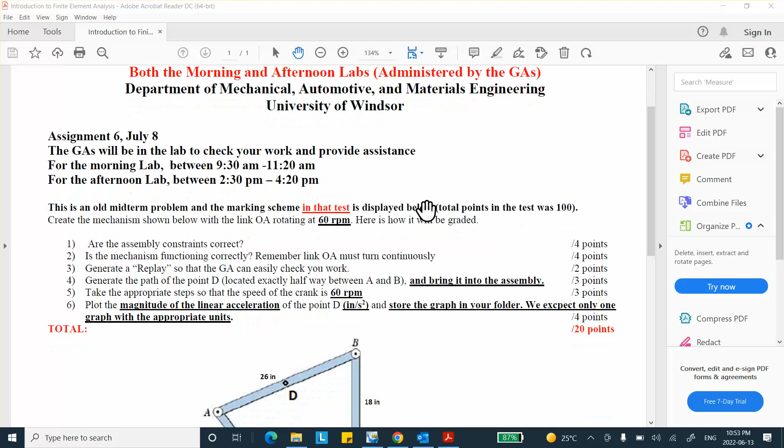Now, it is a problem from another year, a test, I think it was a midterm at that time, but anyway, it gives you an idea of what kind of things are expected, although this marking scheme is not what's going to happen if it was to be given this year. However, at that time, this was the marking scheme.

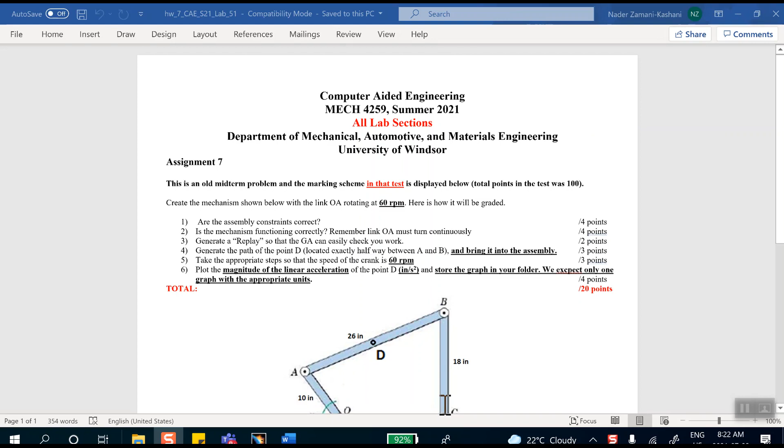This problem is called a 4-bar linkage. So although you see 3 bars, there is also a fourth one, which is the ground, which I'm not displaying here. That's why it's called a 4-bar linkage. So OC is called the ground.

OA is turning continuously, attached to a motor perhaps. This is the crank. AB is the coupler, and BC, which makes an oscillatory motion like this, doesn't go all the way 360 degrees, is called a rocker.

Now, a mechanism of this kind, where one link can make a complete revolution, is extremely important because you can attach it to a motor. For example, the wiper mechanism of a car, where one of the things is attached to the motor, and the other one just rocks back and forth and wipes the window.

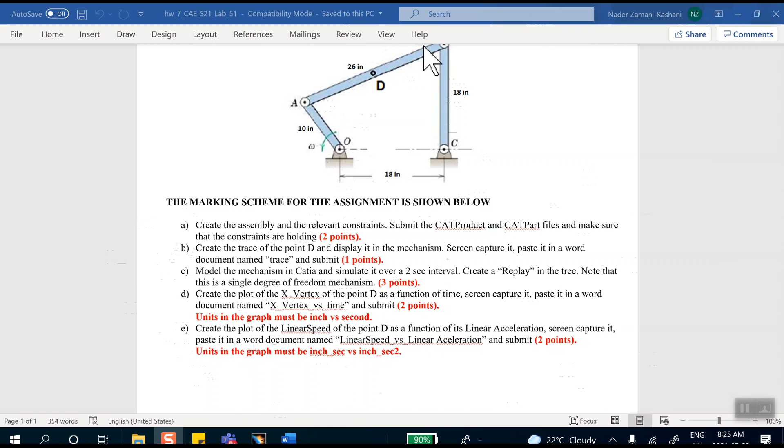Okay, let's go ahead and do that. Notice that these 4 bars are nothing special. All we have to do is make sure the distance between the holes matches what's given, like 10, 26, etc. The thickness and shape don't matter, so I'm going to make a relatively simple one.

First, I'm going to save this product, file, save management, save as. Remember these are all assemblies, so you have to give us the product and the parts. Desktop, new folder. Today is July 8th, and this is homework 7. Let's put it in there.

All right, let us go ahead and make the several parts. Insert new part in there.

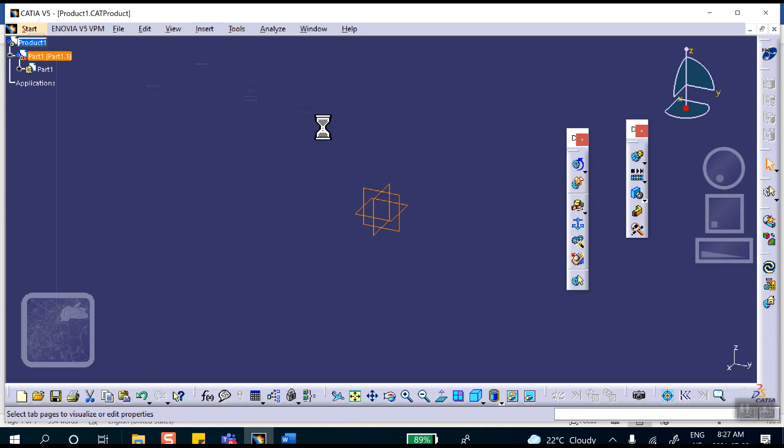First I'm going to make the ground. Let me rename this thing, properties. I'm going to call this thing link... OC, and it is the ground. This is the instance name, and this is the part name, OC ground. Okay, let's make it. Double click on this, make a rectangle.

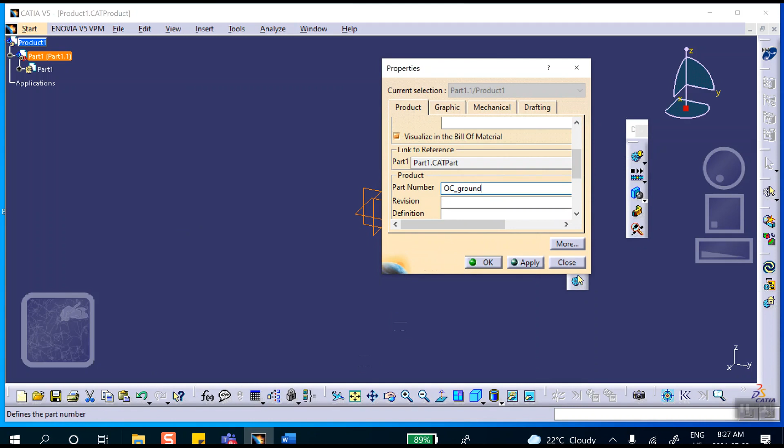By the way, let me go to the assembly design here. Okay, I'm going to switch to assembly design. Now let's make this. Double click on that, double click on this ground part so we go into part design, and on that vertical plane I'm going to sketch a rectangle.

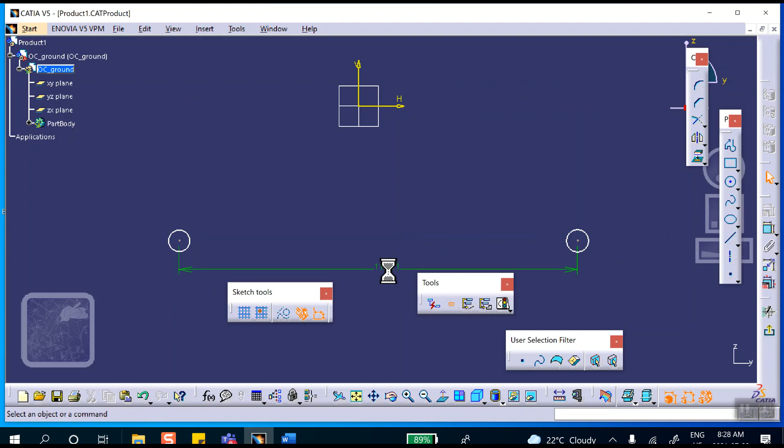Actually, you know what I'm going to do? I'm going to make 2 circles here, one like that and another one like this. I'm going to make the distance between them 18 inches. That's the length of the ground. Let me make this thing 18. Okay, and then complete the rectangle, something like this. So this is going to be the ground length.

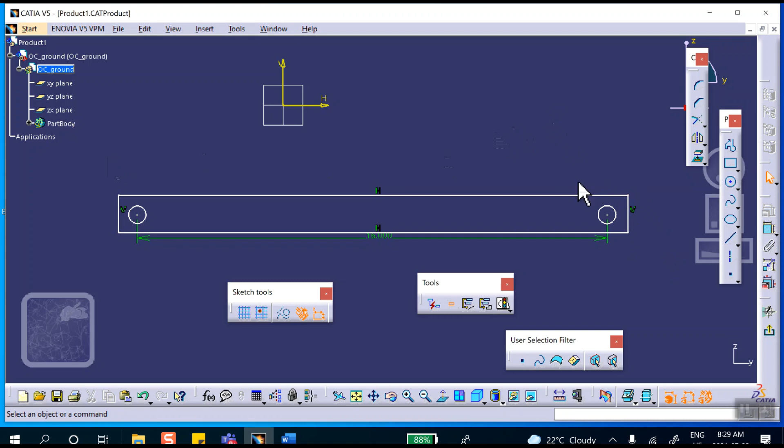Okay, move this thing a little bit to the right. All right, exit, pad it. I'm going to pad all of them by 1 inch, totally irrelevant. Okay, let's go ahead and insert the next thing, which is going to be the crank OA.

So on that, insert new part in there. Remember to insert a new part. This is an assembly, you have to create parts. There's going to be 4 parts and 1 product, and all of them have to be submitted when you do your homework or your test final exam.

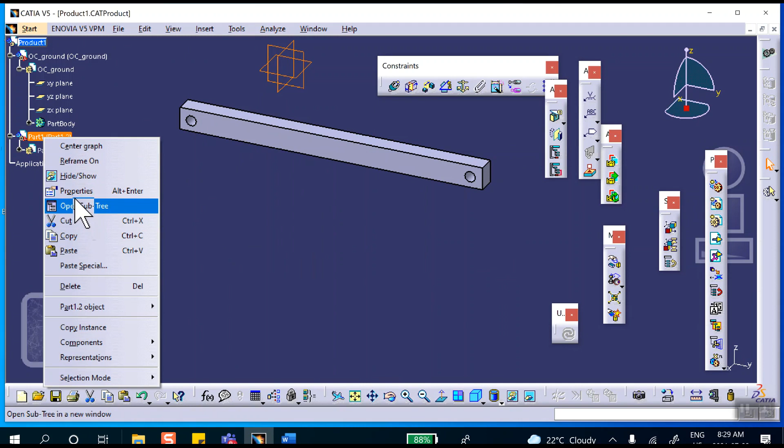Properties. I'm going to call this thing OA, and this is going to be the crank. And down here, OA and the crank. Let's make it, so double click on that. You do the exact same routine. The only difference is that the distance between the circles is 10.

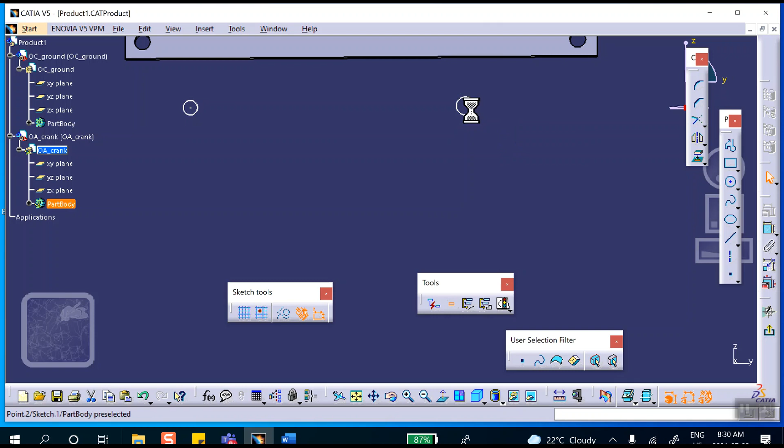Okay. Make a circle here. They don't have to be the same size because they don't have to be the same size as these. So, distance between this point and that point. First let me make it horizontal for the sake of bookkeeping purposes. Actually, well, I'm going to make it 10. It has to be 10. Okay fine, good, move this thing a little bit.

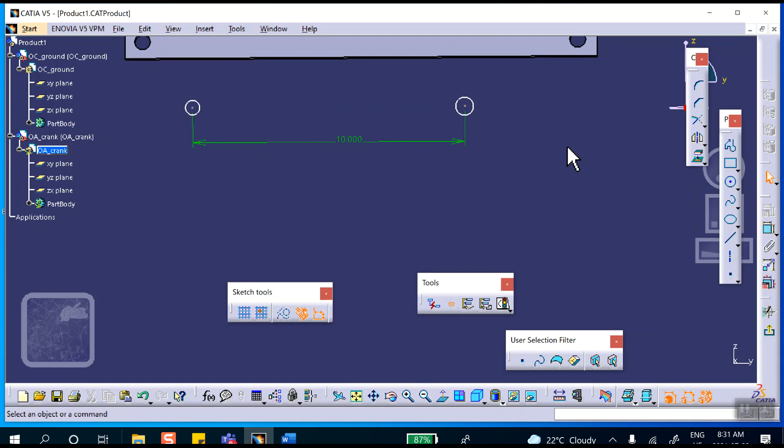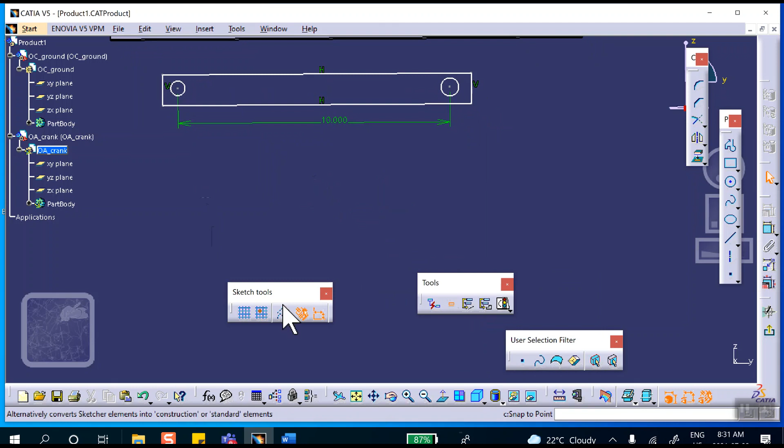Okay, I'm going to draw my rectangle. This is going to be the crank. It just looks nicer if I made this thing horizontal. That's it. Okay, exit. Pad it by 1 inch.

Now let's go insert the coupler. Insert a new part. Say no. Right click, properties. And that is going to be, I believe, AB. AB, coupler. Same thing out here, AB coupler.

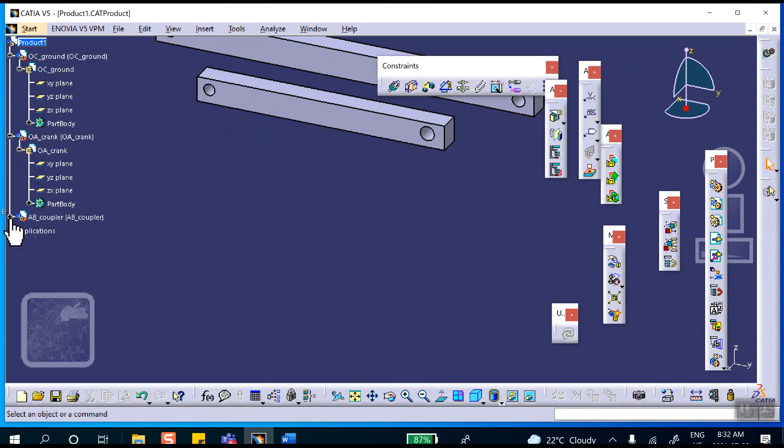Okay, let's make it. Double click on that same vertical plane. We will sketch 2 circles, one like this—too big—another one like that. The distance between them is 18.

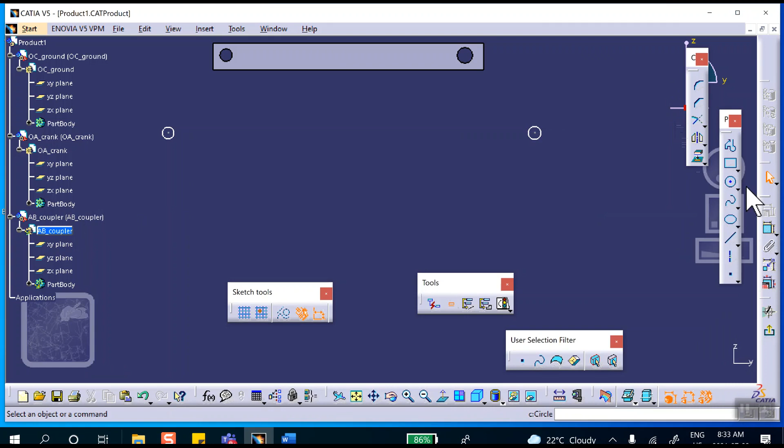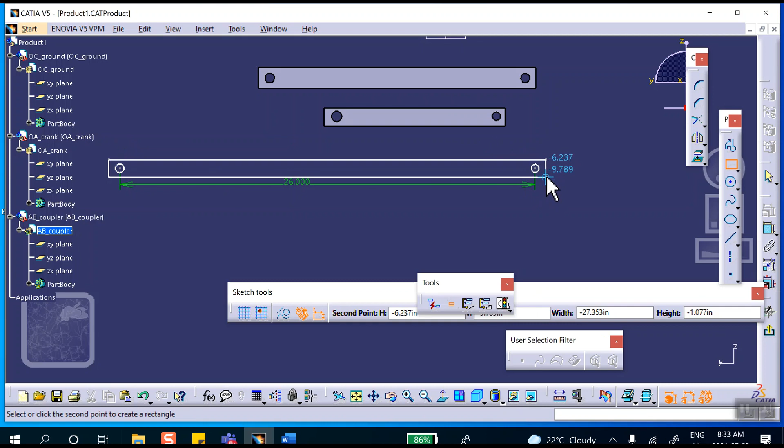Actually, I'm not sure, check. 26, not 18. 26. Okay, and now we're going to complete the rectangle to make kind of something that looks like that link. Exit, pad it by 1 inch.

And finally, the rocker. Go there. No, I haven't saved it for a while, so let me click on the floppy, save everything.

All right, so insert the last part, new part, and this is going to be the rocker, which is going to be CB, right? Properties, CB, and this is the rocker. I can do a cut and paste here too. Right click, copy, go down, paste.

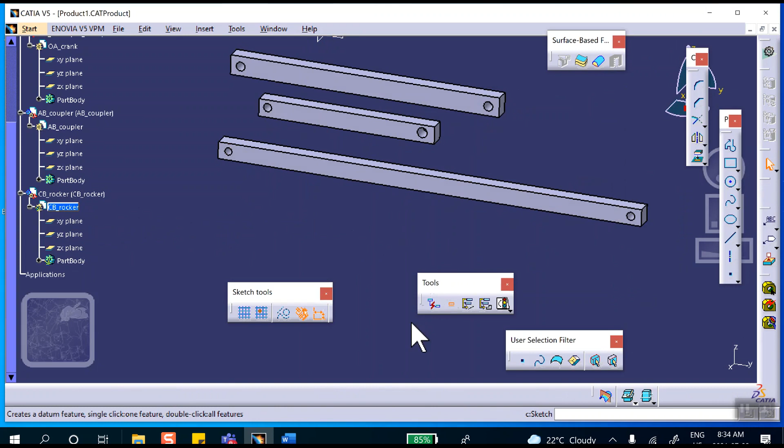Okay, let's go make it. Double click on it, on the YZ plane with a sketch. Now the distance between those guys is 18, right? This is 18.

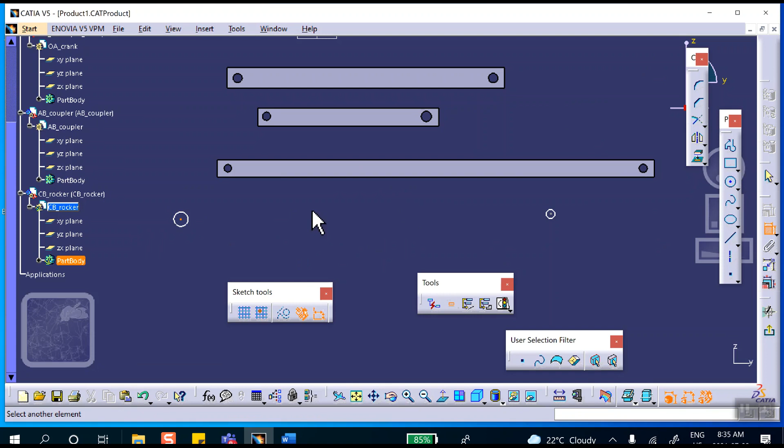So a circle, another one. Okay, so it's fine, they're too big. 18 inches. Okay, dimension between this point and that point, this is going to be 18. Okay, let's complete the rectangle.

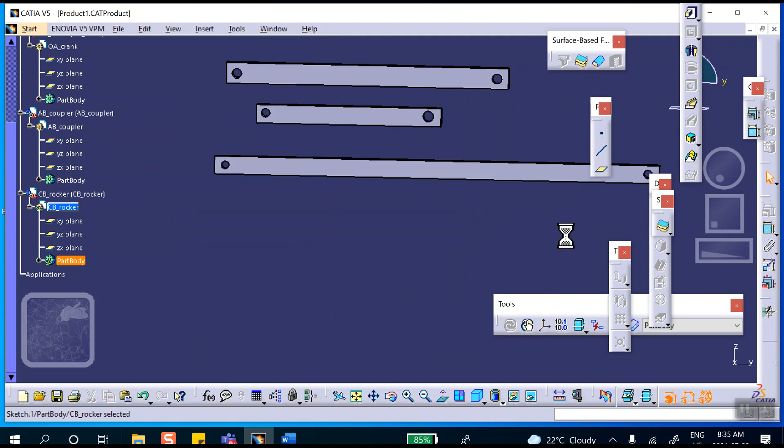Good, I like this thing better. Exit, pad it by 1 inch. Save everything.

And now we use the constraints in order to assemble them. Okay, which one was the rock? I think this was the ground. Let's fix the ground. So here's the anchor. We're going to fix the ground. This was the ground, okay.

Now we're going to put the crank on that. This is the crank, so coincidence. Zoom in between this face, sorry, this axis and this axis. And if you say update, they will line up. You can see that. Let me just move them apart a little bit.

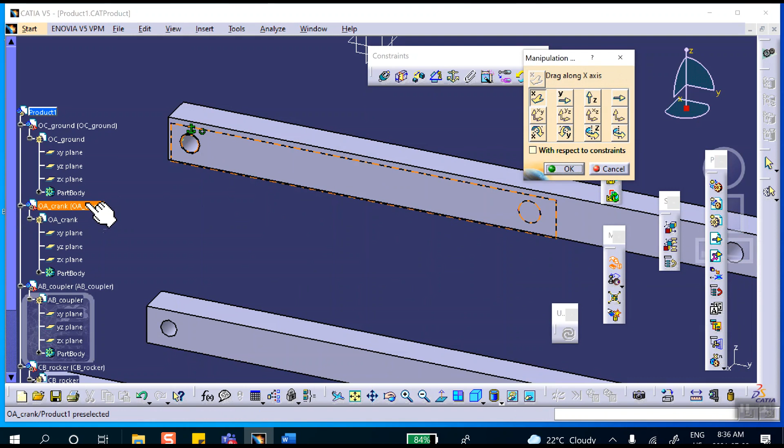So let's translate this part in the X direction so that I can see something there. Because of the way I made it, those surfaces, those sketches are on the same plane, that happens.

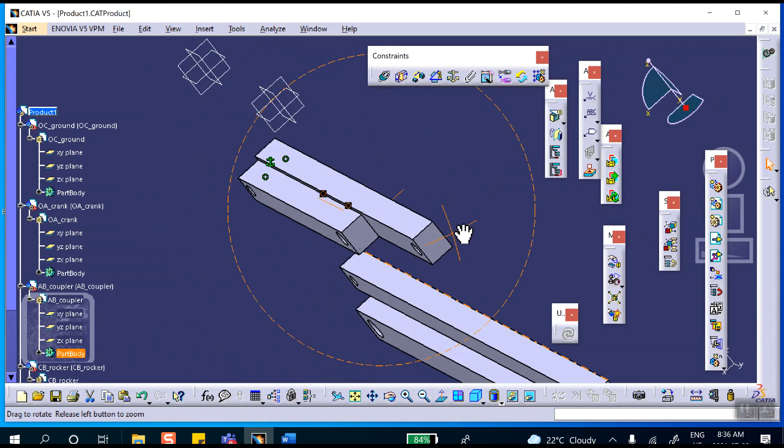Okay, now another coincidence between this axis, the face of that ground, and the face of this. Okay. Update. There we are. Let me rotate this thing a little bit so I can see that. So use the manipulate and rotate about the axis, arbitrary axis. So this is the arbitrary axis. So like this. Very good.

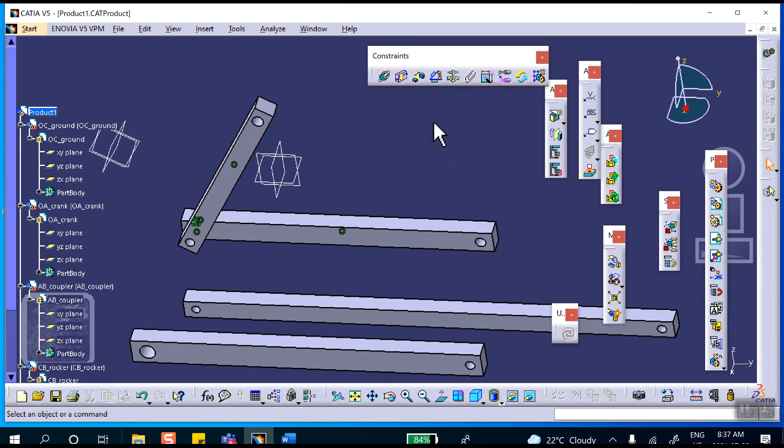This is going to become a revolute joint. And then I'm going to put, how about putting the rocker there? So coincidence, rocker here. Rocker, not rocket. Coincidence between this axis and not coupler, that's what I meant. Coupler there. Okay, update.

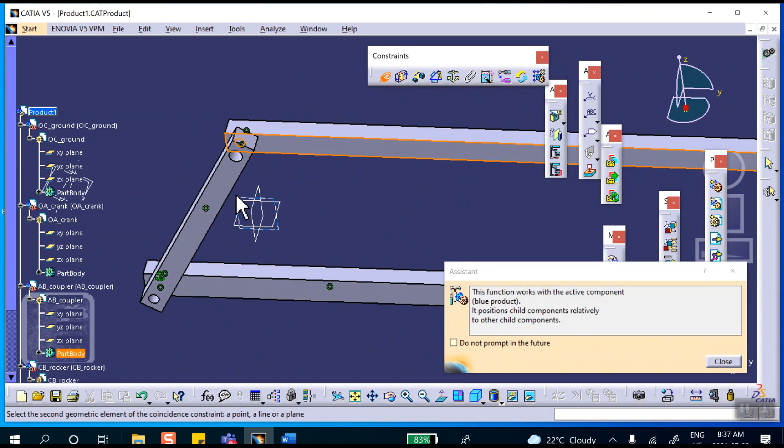This is fine, but except that I want it to be on this side. Okay, that's no problem, so I do another coincidence later on. Coincidence between this face and that face. These arrows tell you whether this is going to end up on the other side or on this side. We'll find out - if it doesn't work, we're going to make this thing opposite.

There, obviously I want it to be opposite. Okay, so you go here. The mechanism works, it gives you the correct kinematic information. It's just that it doesn't look good. So say more, opposite, and update. You see that it ends up on this side.

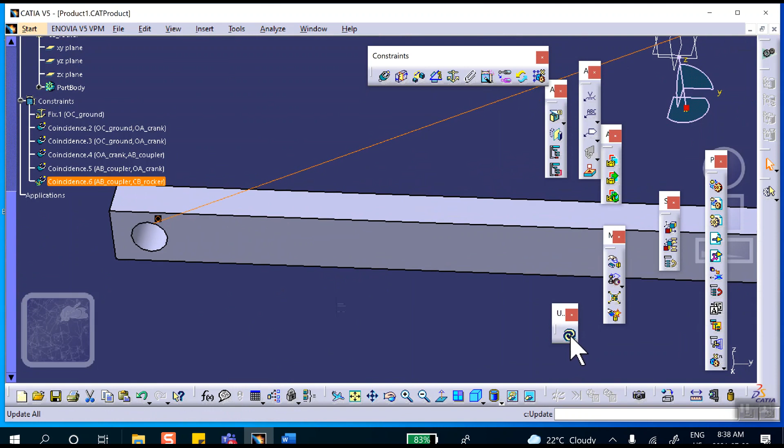Very good. Okay, and now I'm going to put the coupler here, the rocker there. So, well, actually, let's do the coupler first. Coupler and the rocker. Okay, coincidence between the axis of this coupler and the axis of this. Okay, so I want that guy to be on the top. Okay, and update. Let's look at it for a second.

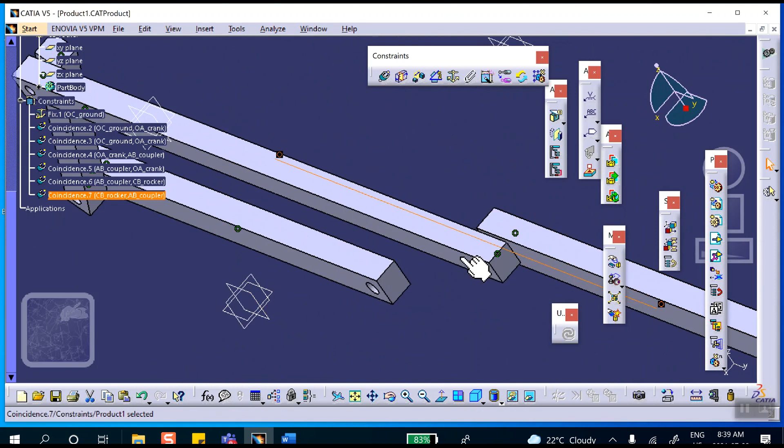Okay, that's good. And then the coincidence between this face and that face. Okay, update. Now what I want to do is bring that hole and make it coincident with this. Let's do that first. So coincidence between the axis of this and the axis of that hole, and update. Okay, so this is fine.

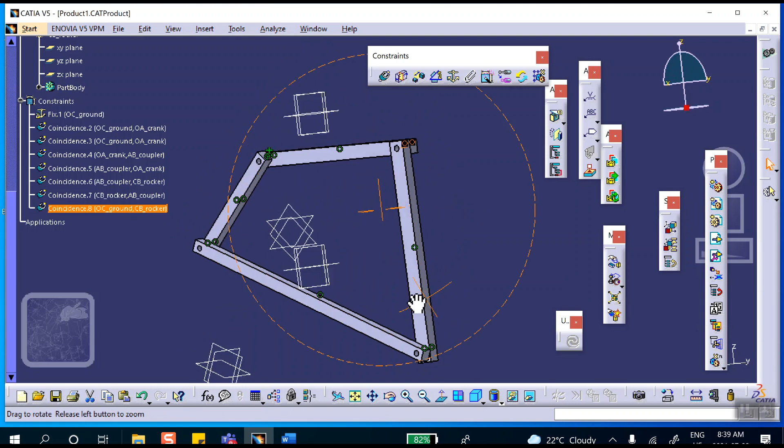There's only one thing, and that is notice that it ends up in the right spot because I padded these the right amount. In other words, this bottom one is going to convert into a cylindrical joint. If you want, I can also do a face to face, and it's going to become revolute later on, but it is not necessary. So I should have 3 revolutes and 1 cylindrical the way it is. If you had done face to face for the last one, you will get 4 revolutes, which is unnecessary, but that's fine. So save everything.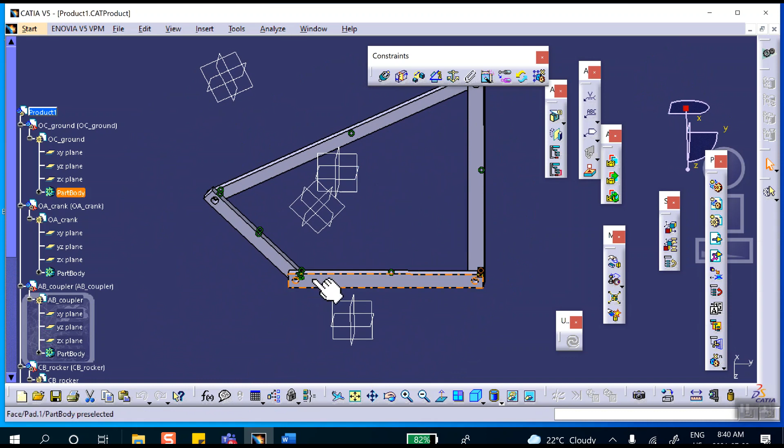By the way, I think my ground is right here. This must be my ground. Let's check, let's check which one is the ground. Yeah, that's the ground. So my mechanism later on is going to be like this: this is the ground, this is the crank, here's the coupler, and this is the rocker. Okay, good.

So we're good, we saved it. Now we're going to go to DMU Kinematic. So digital mockup, DMU Kinematic. And we're going to convert automatically all the assembly constraints into joints. So get the magic wand, right? Where is that? Right there.

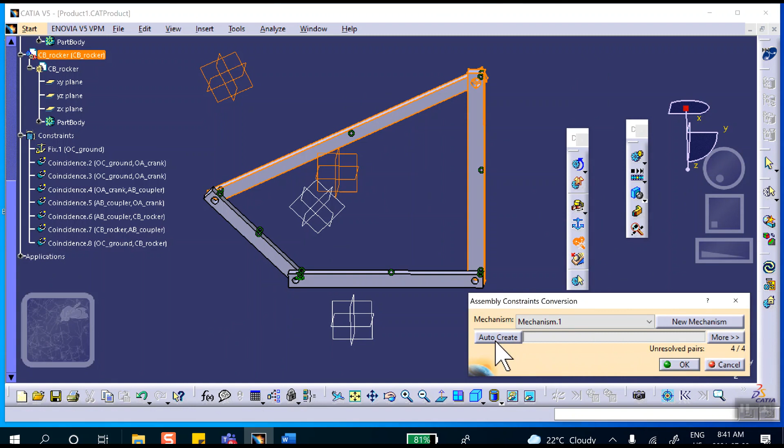New mechanism. Okay. Mechanism number 1, auto create, so that all the joints are created automatically. Okay, and then let's check. You should have 3 revolutes and 1 cylindrical. Natural degree of freedom is 1, and there are 3 revolutes. Now notice that because we renamed the instances, it tells us exactly what these joints are.

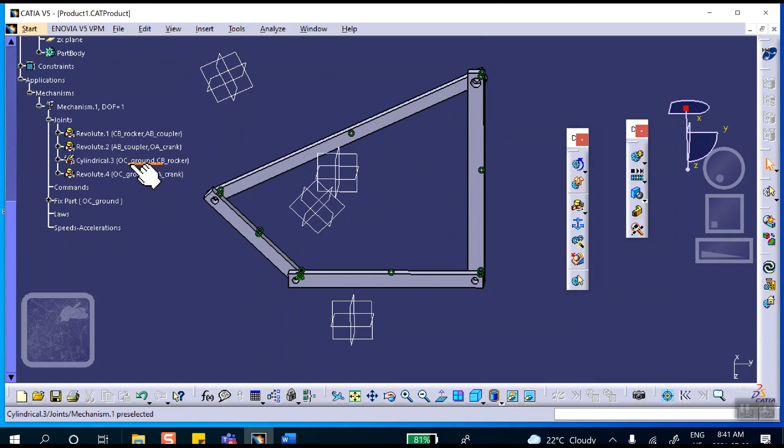For example, cylindrical joint between the ground and the rocker. Remember that last one? I did axis to axis, I did not do the face to face. Okay, good. So now 1 degree of freedom.

We're going to take, for example, the one between the crank and the ground, which is this last one, crank and the ground. Double click on it. Make it angle driven, 0 to 360, because you're going to attach it to a motor. Mechanism can be simulated. Let's check it out first of all with the manual command.

This is it. This mechanism is called simulation with commands, that's what I meant. So if you drag the sliding bar, this crank starts to move.

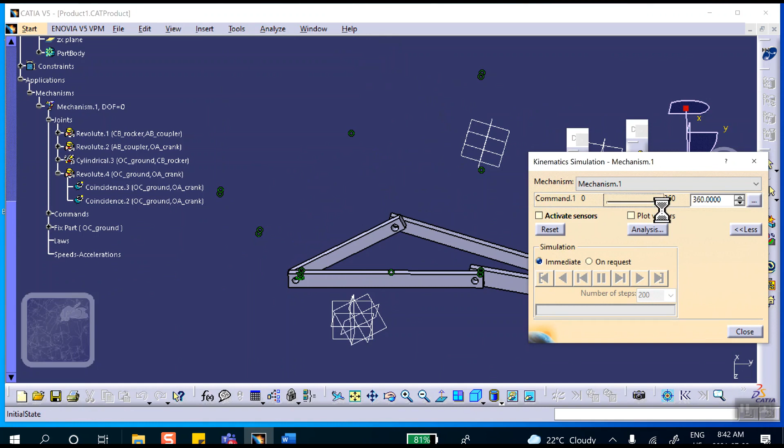Okay, but it does not go 360 degrees. So let's go and check our dimensions, because I have a feeling we did not do it correctly. Let's go ahead. I noticed it didn't go all the way, so let's check that.

First of all, the ground should have been 18, 10 for the crank, 18, 18, 10, 26, 18. Let's go ahead to our ground. That length should have been 18. Does this say 16? Ah, there we are. This should have been 18.

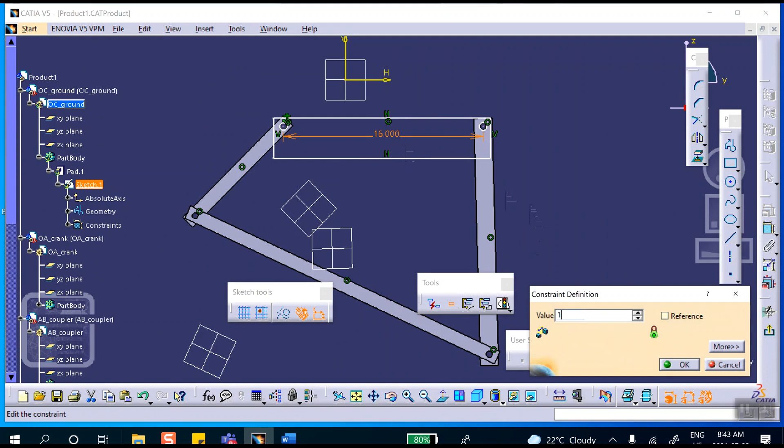Because with what I had, this is no longer a Grashof mechanism. There's no guarantee that any link can turn 360 degrees. Okay, that should do it. I think the rest of them are probably okay.

Good, now let's update. Let's go to the product and update. There we are. Okay, now let's try simulation with command. This crank should go 360 degrees.

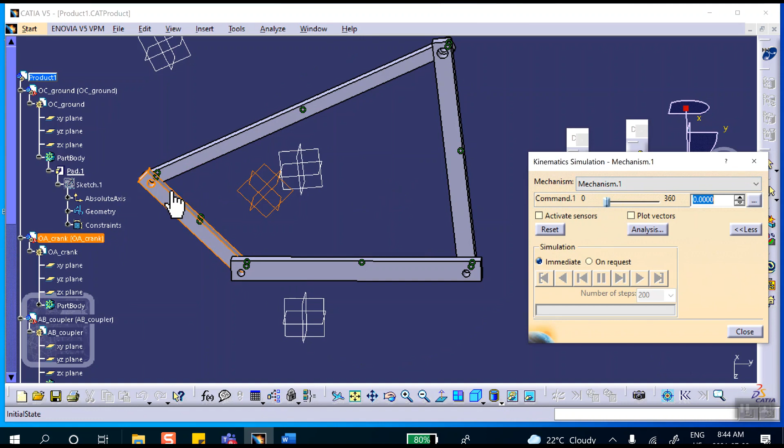Yeah, now you see what a Grashof mechanism is, the difference between Grashof and non-Grashof. Okay, good, so this is fine.

Now we're going to do simulation because I want to compile it, get the trace and everything. This is automatic simulation, basically making a cartoon. So you drag this thing all the way, insert, change it to anything but one, rewind and play it continuously. There we are.

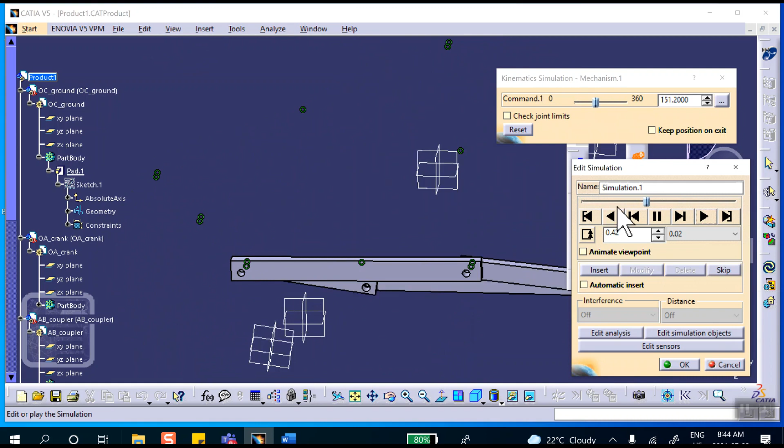So as the crank turns, this is what happens. It goes for it, yeah. If you want to make them go back and forth, it's right there.

Now we need this simulation because you need to compile it to get the trace and everything. Okay, cancel, let's say reset.

Okay, good. Now remember, I want some information about the point here, which unfortunately I forgot to create. So let's go ahead and create that point right at the middle here. We're going to go back to the coupler.

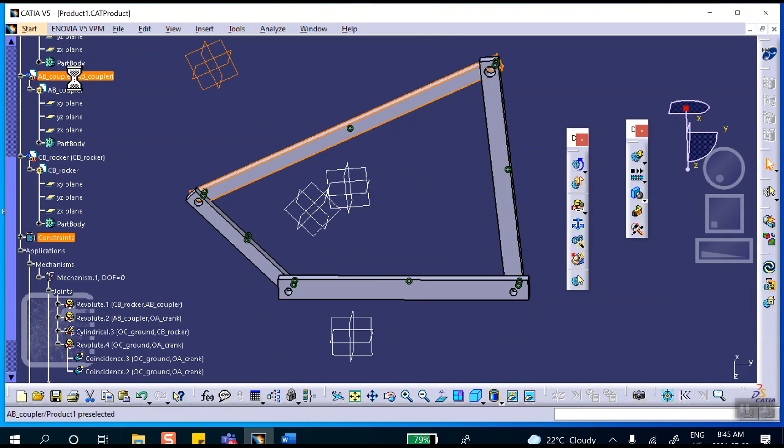We go back to coupler. We are in part design. Let me hide this guy, let me hide that guy. Now you can see the coupler right in front of your eyes.

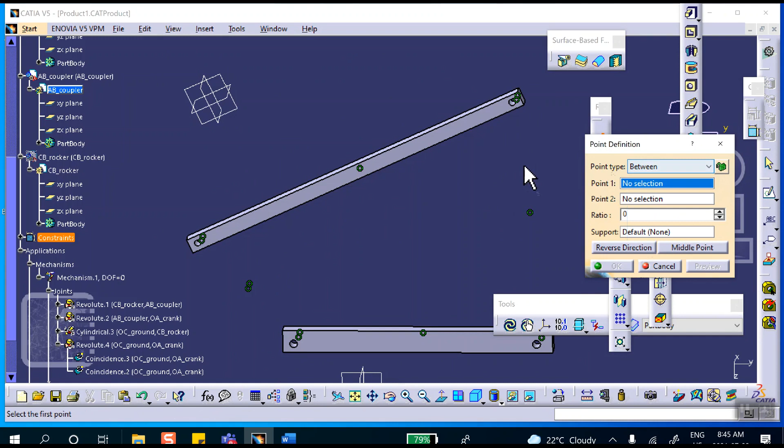So we're going to create a point. Create a point, not with coordinates, between two points. Point one, put the cursor here, center of that, right? So I create a point here, right click, create a point, circle center. What I'm doing is creating a point here, right at the center of that.

Do another one, point two, right click, create a point, center of that, because I didn't have points there. It says create a point between point 1 and point 2 that I just created, exactly the middle point. So it creates a point exactly at the middle of those two points I temporarily selected. Okay, I have a point here, right there.

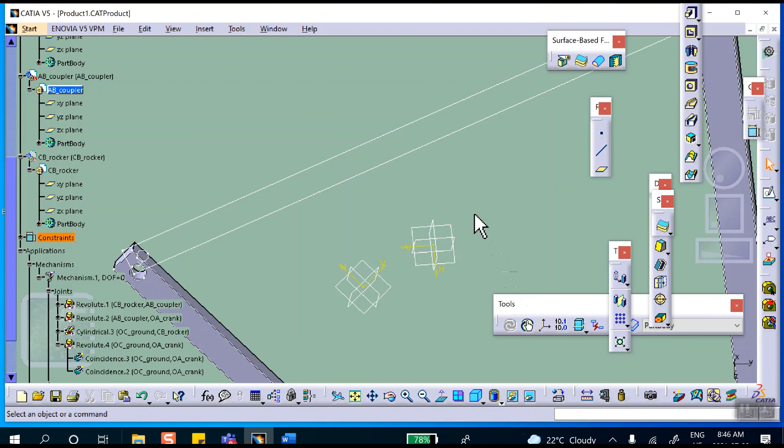Okay, let's get these things back to our screen. Get them back here. Very good. Okay, so we're going to go back to the products, in fact your digital mockup. We created a simulation, it's right there.

You can see that, and we're going to compile this. Create, compile a simulation. Okay, so don't use one, use anything but one, and create a replay.

I don't want a video file, I just want a replay. You need that in order to be able to create the trace.

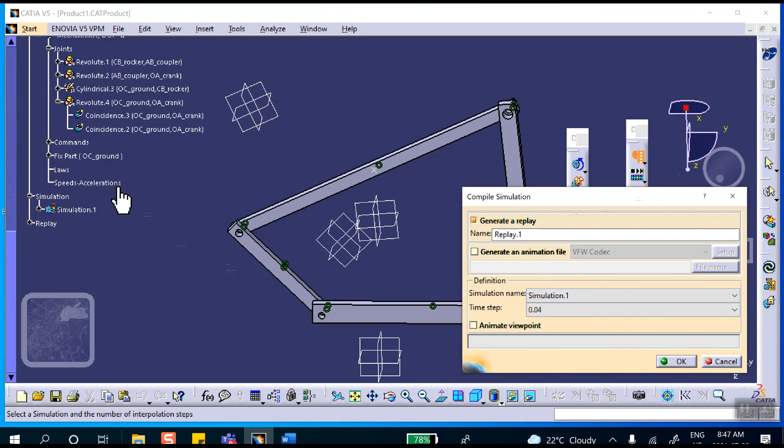Okay, good, now here, once you create that, you can go to the trace. Read it carefully: it says element to trace out is this point, because I want the trace of this point. Reference product is product 1, and 26 is the number of points that it creates as a part. So right there, you can see that. That is the path that that point is going to traverse.

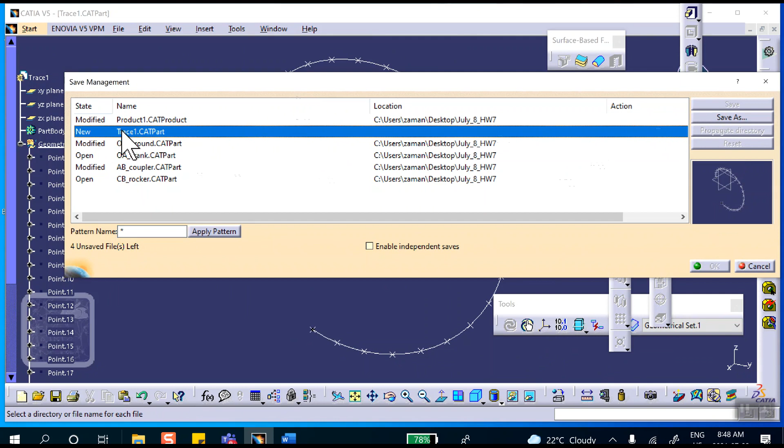Right there. Okay, now you can save this thing, let's do that. File, save management, just in case you need it, in case you want to bring it back to the assembly design workbench and put it with the rest of the mechanism. But I'll tell you in a second.

Let me cancel that. Save as. Okay, fine. Okay, that's fine, yeah, okay, fine.

But for the purpose of this homework, what we are asking you to do is, after you create the trace, right here, I'm going to change these two, because the trace has to be done after you created the mechanism, or simulation.

You screen capture it. We ask you to screen capture, but that's fine. So there we are, let me do a screen capture. You can do a cut and paste. Print screen, where's that print screen?

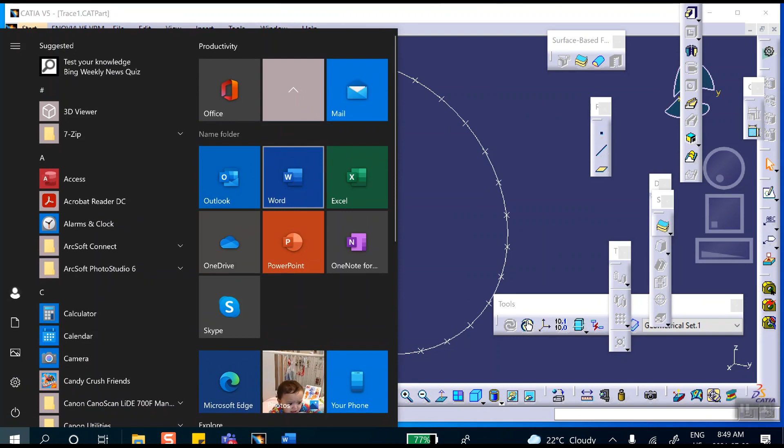Okay, start the Word file. Paste it. Now you can prove to us that you know how to create the trace. File, save as, let me put it in that same folder.

July, desktop, July 7. Okay, I'm going to call it trace. I ask you to call it trace.

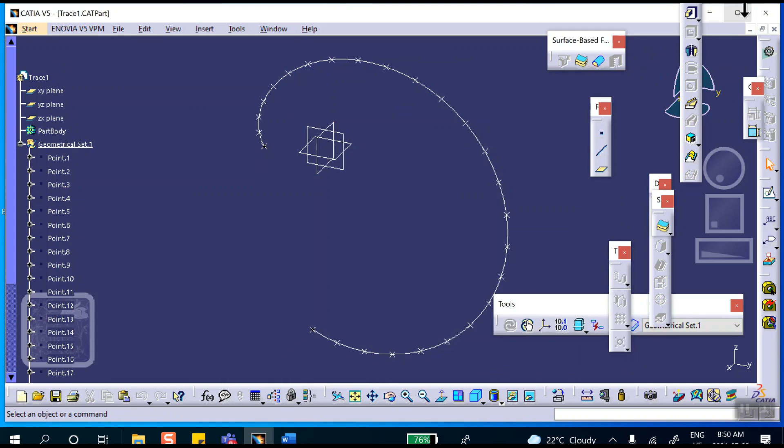Close that. Now you should have this thing in your folder. Oh, July 7 or July 8? Oh yeah, July 8, homework 7, right there. You can see that. So the TA is going to double click on this thing, see whether it's there, and he knows that you have done that part.

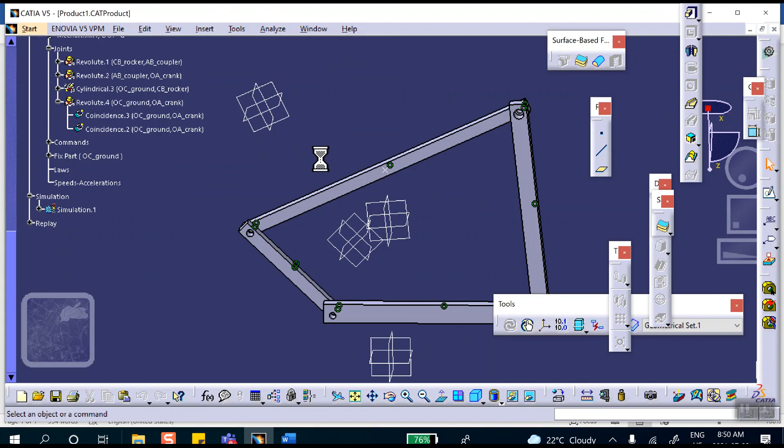Okay, then we are asked to put some physics into the problem, so that the speed of this thing is 60. Oh, I can close this, I don't need it. Okay, we're going to put some physics into this so that the speed of the crank is 360 degrees per second, or 60 RPM. So you go to the f(x),

Click on the mechanism, there is your command, add the formula. So: 360 degrees divided by 1 second, times time.

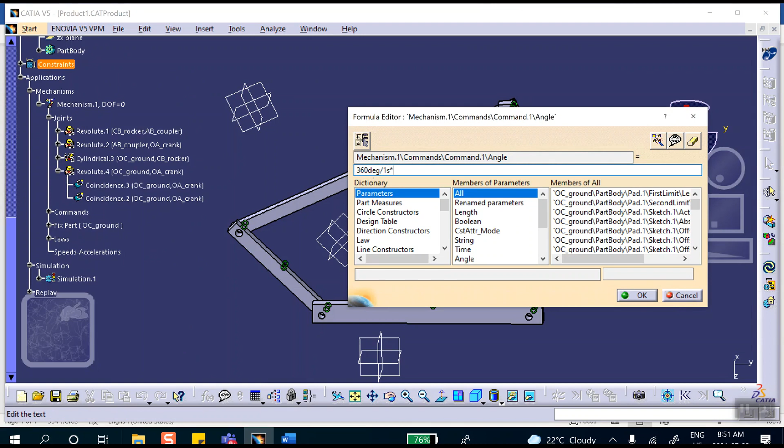This tells you that the speed is 360 degrees per second. No messages, everything is fine, the units are correct on both sides of the equation. And it says simulated over a 2-second interval here.

Okay, so, yeah, simulation with laws, not 10 seconds. Default is 10 seconds, do it over 2 seconds.

Okay, now I haven't activated the sensors yet. First, let me make sure that it's working, and then I'm going to create my sensors, the ball rolling down the ramp, and then plug things in. So there we are. There's physics here.

That's how it's going to look. All right, good. So rewind. Okay, good. Close it. Now we're going to create sensors, a ball rolling down a ramp. There we are.

The first one is, what is it that we want to plot? The first one is X vertex as a function of time. So this one I'm going to call X vertex versus time. Okay, and reference point is right here.

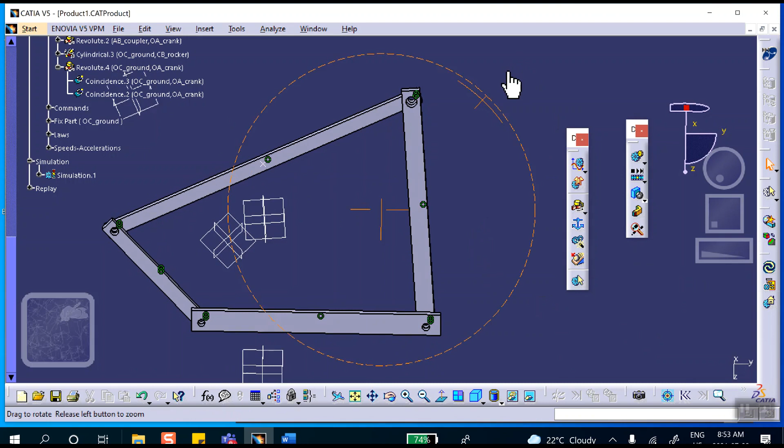This, or reference point is the ground. The point is down here. Okay, and we say okay. And let me do another one. And the other one is...

Reference point is there. There are different ways of doing this thing and achieving what they ask you, but here's the way I'm going to do that. That's this point. And the name of it, I'm going to call speed and acceleration. Okay.

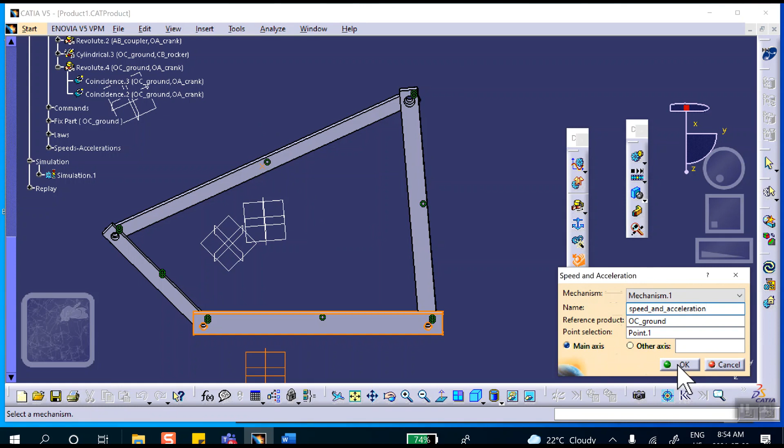Good. Okay, so let's do simulation with laws for the first graph, over a 2-second interval, activate sensor, and that first sensor is just, all I wanted to do was X vertex. Okay, X vertex, or X of point 1.

Okay, if instead of vertex I selected a point, I did select the point, and this is it. So move this thing out of the way. Did I select it? Yeah, right here it says yes. Okay, play it. This is going to generate a graph, which is the X position of the point versus time. It's going to be 2 seconds, right? Yep.

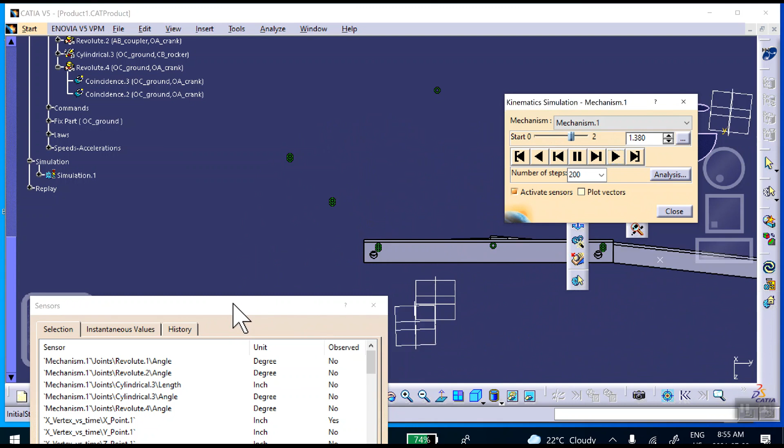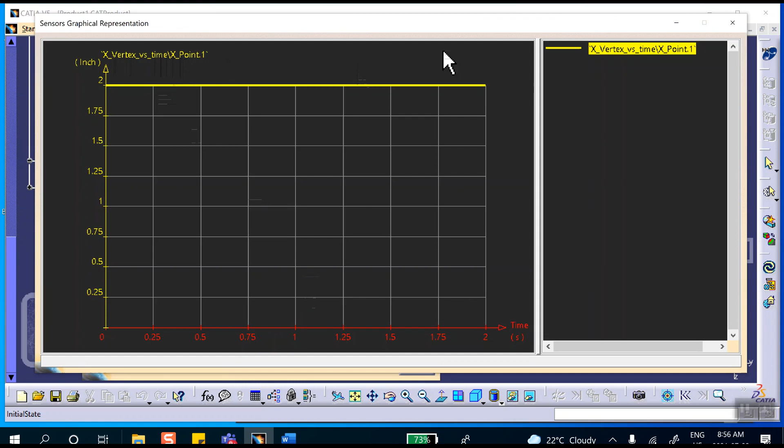Okay, good. And now we're going to go graph it. X vertex versus time of point 1. There's something wrong here. Did I select the right point? What was this point that I selected? This was point 1. Yes, that's correct. X position. Oh...

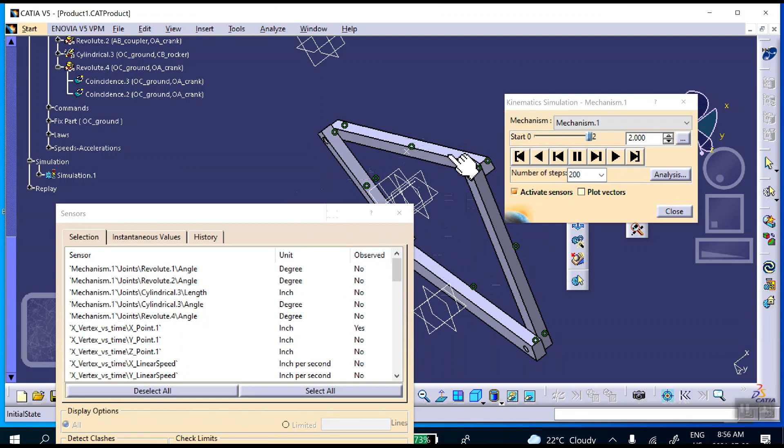I actually wanted a different component because of the way I created these things. Okay, maybe I should have asked for the Y component because the X component is always 2. This is not a lie, it's just that X vertex is always 2, or yeah, for that particular one it's always 1, right? So I really should have done a different thing instead of this. I wanted, for example, Y.

Okay, if you want, you can also get Z. In fact, you can get all 3 of them. But yeah, so you got to be careful here because I don't know how you created your model. It could be that you created it in a different plane and X is changing, but for me, X is not changing. That's fine.

Yeah, so you got to be careful. So let's see now, just to show you what I mean by that, here's X that I selected originally, here is Y, a different point. Okay, rewind this thing, rewind this, clear the history, and I'll play it again.

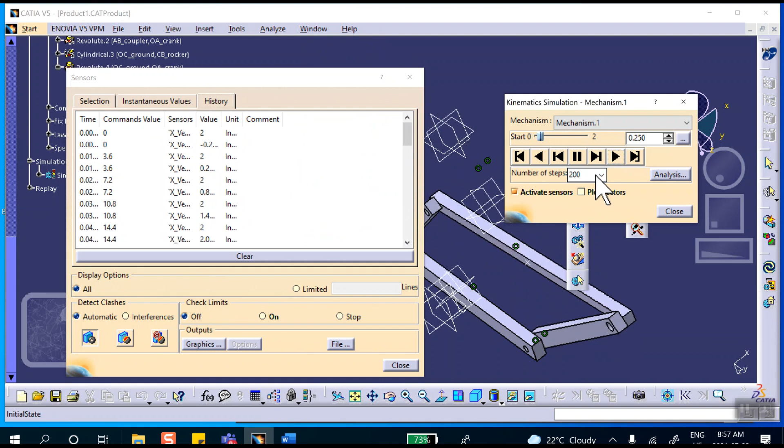So this time it's going to give you 2 curves. X position, that's not going to change, it's still going to remain as 1, okay? Or 2, maybe it stays at 2, I think it was 2. But the Y position is going to change because I created my parts in the YZ plane. The X is always fixed.

Actually, I'm going to change your homework so that it says X and Y and Z, all 3 of them, okay? So that you don't run into that problem.

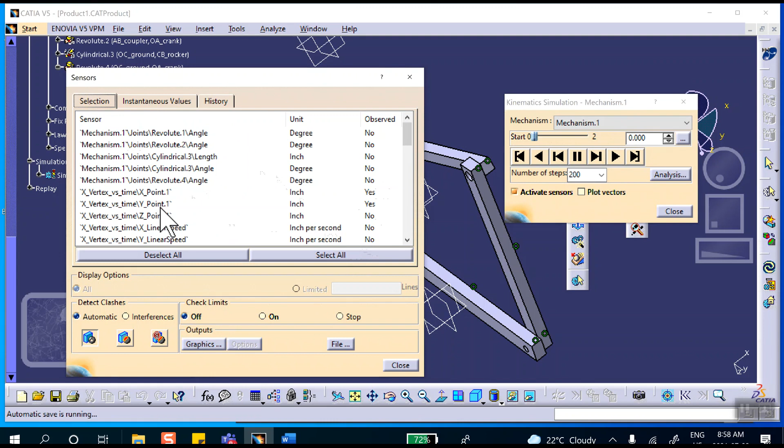Let me see, I'm running into some issues here. Okay, and Y. Let me clear the history and do it again. Okay, let's go back, rewound, clear the history, do it one more time. I'm running into a problem. I want this thing to be faster too, so let me make it 80 instead of 200, so it's going to go faster.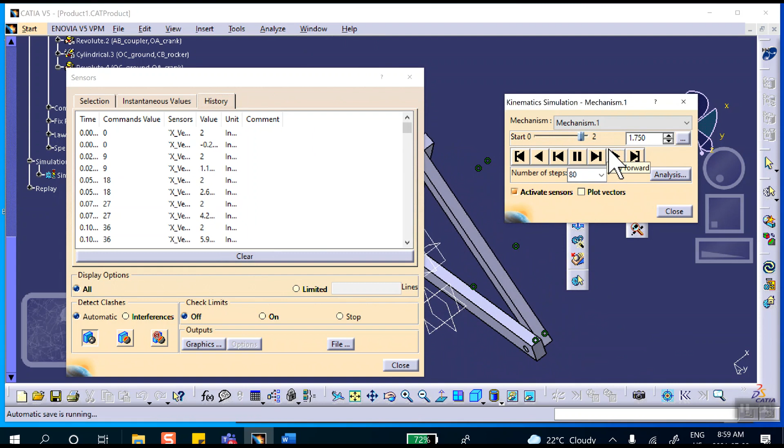And when you graph it, it should give you 3 graphs. Why is it not giving? Oh, maybe, wait a minute. Why is it not giving me the graphs?

Oh, it was hiding back there. Okay, so notice that I asked for 2, I got 2. The original one was the one that I really didn't want. I wanted the Y, and if you do the Z also, it's going to be different, a different curve.

Okay, good. So let's screen capture this. Print screen, get a Word document, paste it, save it, save as.

Is that the right folder? July 8, desktop, July 8, right there, homework 7. And I will call this thing X and Y because I screwed up.

Of vertex. Actually, because I did not pick a vertex, I selected that point. It says 0.1, I'll just remind you, 0.1. Okay, so that's going to be saved there. The TA can see and make sure that you can do it.

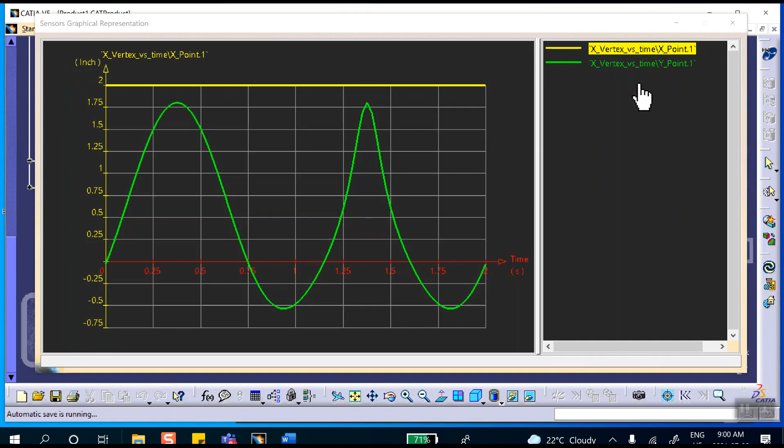Now let me rewind this, and close that and close this. Do it again so you don't get confused. So click on that one more time.

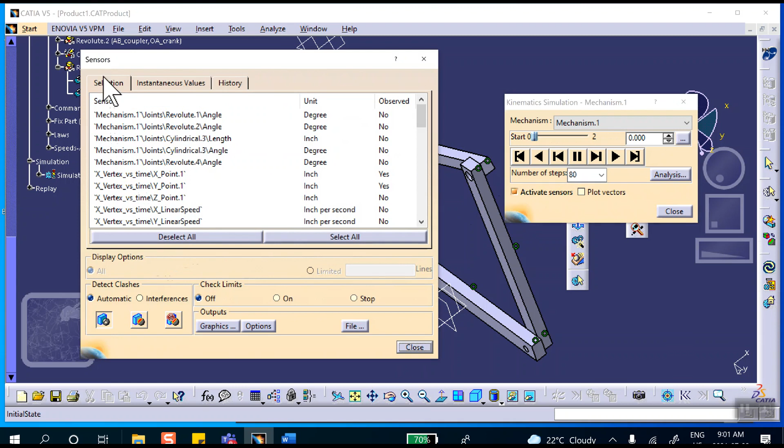Activate sensor. But the sensor that I want is for that second one, right? So let me undo these. I want the speed, and this thing actually was not very helpful.

Okay, this was not very helpful. So let's do it like this. That one was not. I thought that you could actually get the actual sensor that you created, and no. Oh, wait a minute, hang in there.

Hang in there, so let's see. There must be 2 sensors here. This is one. So let me. I was thinking maybe you could select. Let me cancel that, just so that I don't get confused.

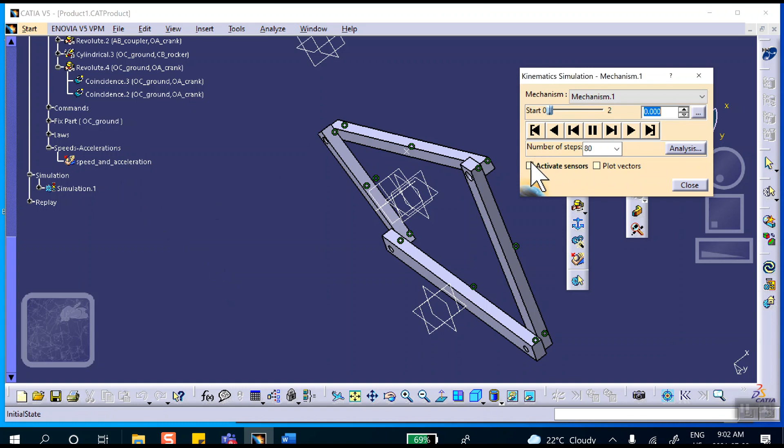Let me see if I delete this, what will happen. Okay, because I'm done with that, so let's go ahead and see. Click on it. Activate sensor. Yeah, so okay, let me select the linear speed.

I did some extra work, there was no reason to create 2 of them. Okay, I could have done it with a single sensor. So let's see now, we want the linear. What does it say? It says linear speed versus linear acceleration, that means the magnitude. Okay, so let's go linear speed.

Okay, linear acceleration. Let's make sure linear speed, that is selected right there. See that linear speed selected? Yes, it says yes. Linear acceleration is there, it's also selected.

Now you go to options, you create a customized curve, add, we want the linear speed versus linear acceleration. Right there, right there. Linear speed, linear acceleration. We say okay, and we say close.

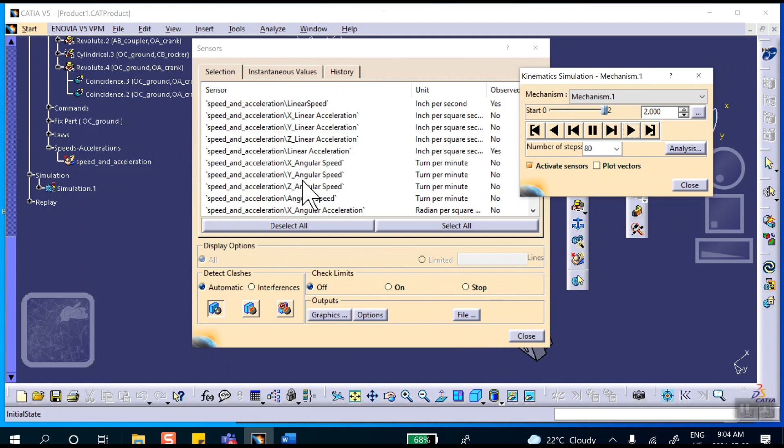Where are we going to run it? I'm really sorry about the fact that I created two sensors here. One of them would have been okay, and you could have followed exactly the way I did, okay? It was not necessary to create two separate ones. It got me into trouble. That's fine, that's what we are here for, make trouble.

Okay, so this is going to give you the velocity, the graph, which is speed versus acceleration of that point. There we are, okay? So that's what it is. If you look at it, this axis is acceleration, and this axis is speed. Okay, and it is complicated.

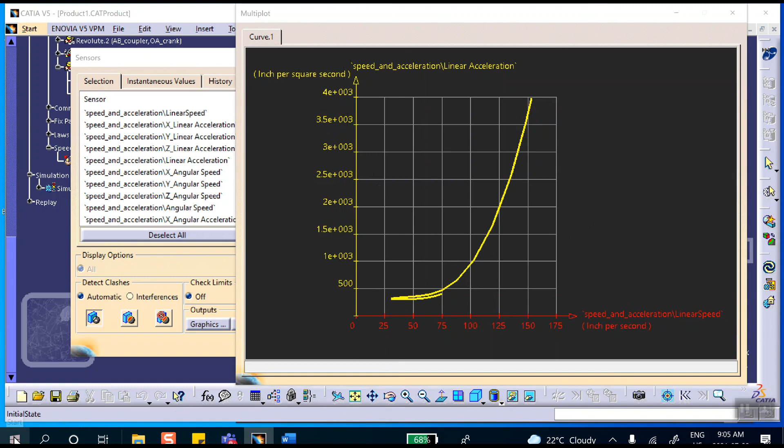Okay, so let's screen capture this, print screen, another Word document, paste. There we are, save it. File, save as.

That was this folder, right? Actually, let's go find it. Right there, this desktop, July 8th. And I'm going to say speed, linear speed versus linear acceleration. All that means is the magnitude, not the specific component.

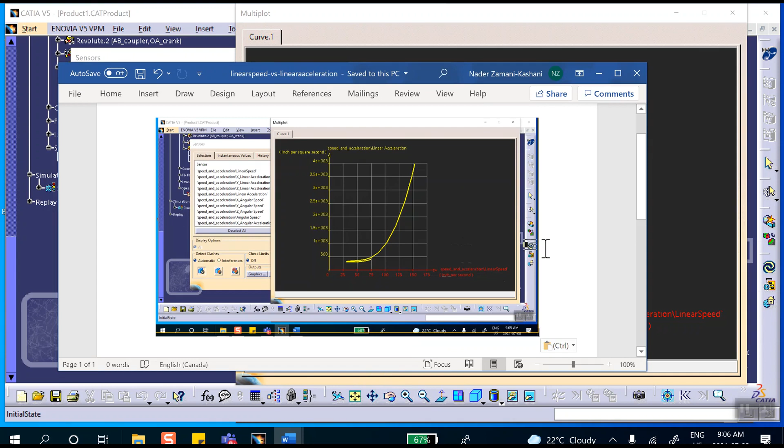Linear acceleration. Close it, close these things.

Incidentally, if you want to bring that trace that I saved into the part, so insert existing component in there. Okay, it was a trace, right? It was a trace, bring it in if you want. You're not asking it because you have proven that you can do it by giving us that Word file. Okay, but there we are.

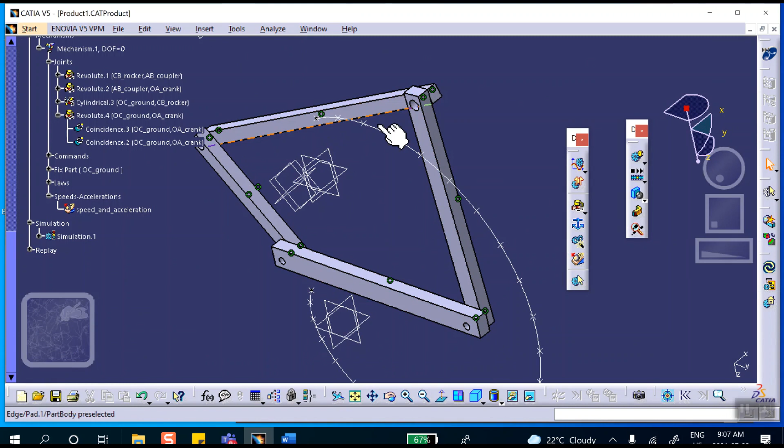And if you actually replay it, you can see that this point goes through that. Okay, so and of course it goes back. You know, in 2 seconds, it starts here, it goes here, and then because this thing changes orientation, it goes back along the same path. So if you click on the replay, you can see that that's how it works.

Yeah, that's good. Okay, and notice that if it went further, it'll go back because this guy changes orientation and it goes back. This path is not a closed path.

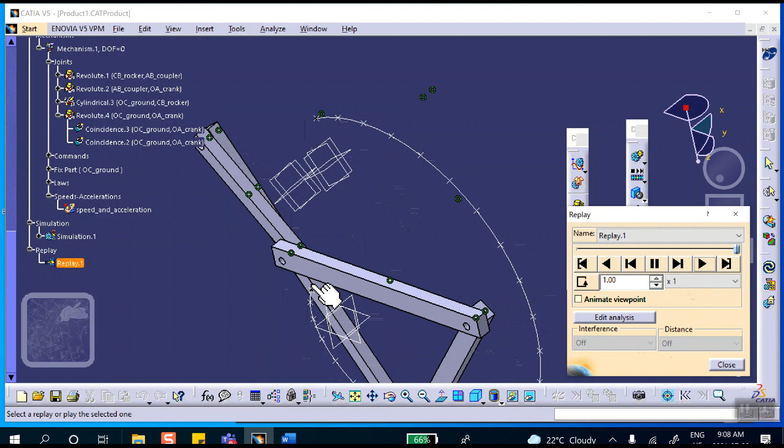Okay, all right, I'm really sorry about this business of sensor, but we have done several other ones in the class. So I don't know, I created two sensors for two sensors with different names, but I didn't have to. The information that I got could have been done with a single one, and yeah, that's it. Good luck.